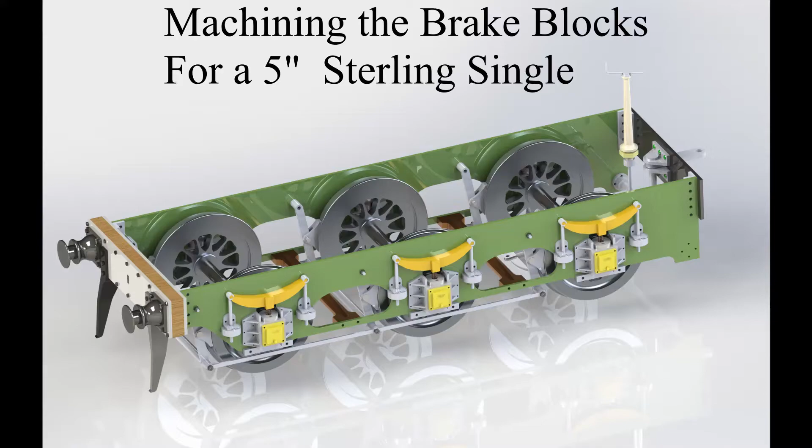Hi, well, it's Graham here, and I'm going to describe making the brake blocks for a Stirling single tender. There are a number of ways of making the brake blocks, and quite a few of the model locomotives that are available have castings for the brake blocks, but for the Stirling single there aren't any. So I'm machining them out of a solid.

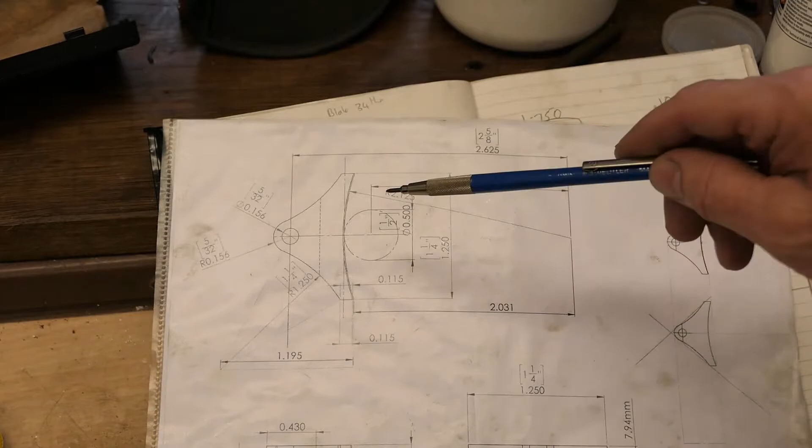There are a number of ways of doing this, and there's a number of videos on YouTube. One in particular shows the use of a boring head, and the brake block is held in a milling machine with a boring head, and this radius is cut. I'm going to do it slightly differently, and I'm going to use the rotary table.

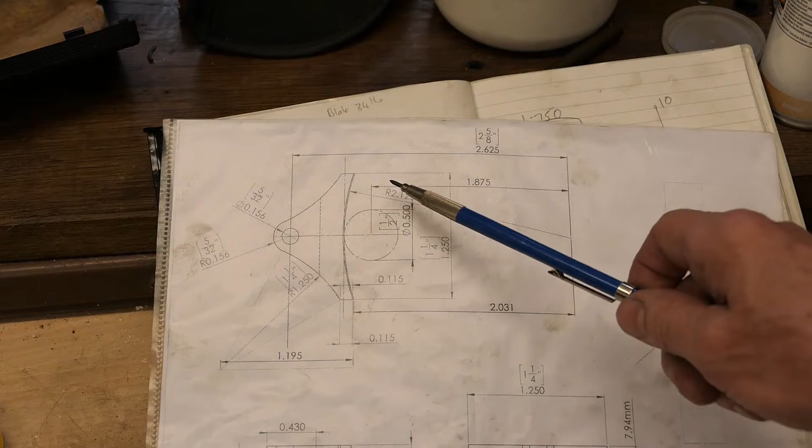I've drawn this out on a CAD package, and the radius that we want to put in is 2.125, 2 and an eighth. The circle here simply represents the cutter. So the idea is we cut it with a slight angle, because the wheels are not parallel. There's a 1.9 degree angle on the face of the wheel.

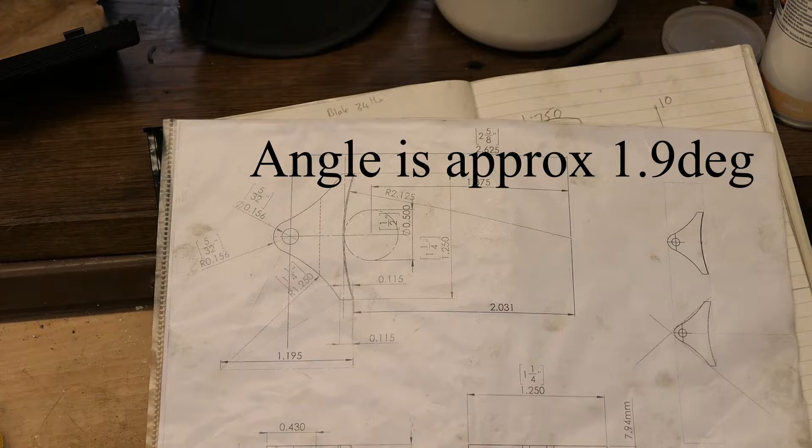So what I'm going to do is to tilt over the Bridgeport head. I'm fortunate I've got a Bridgeport, so I'm going to tilt over the Bridgeport head by 1.9 degrees and then cut this. Now the question is, how do you get this all set up so that you get an accurate radius? And of course it wants to be reasonably accurate.

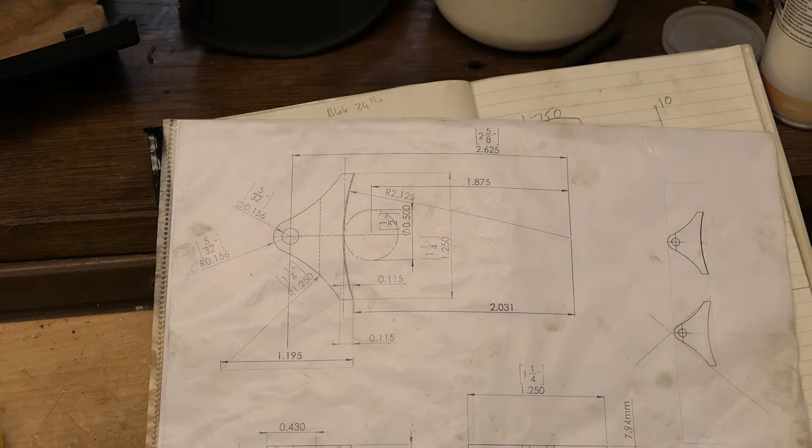Well, the way I've done it anyway is I've had some aluminium. I've had it for ages, some scrap aluminium basically. And what I've done is drilled a hole here for a peg which mounts on that, and then here at the root of the radius I put in a 1/2 inch hole.

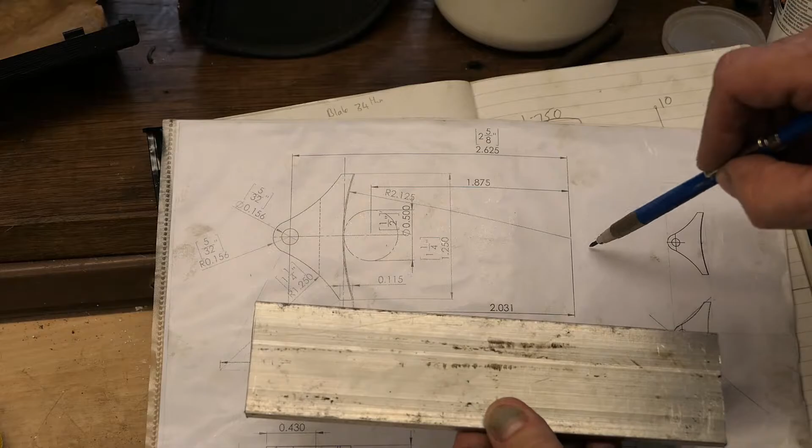Now that I've got a clean memory card, I can carry on with the video.

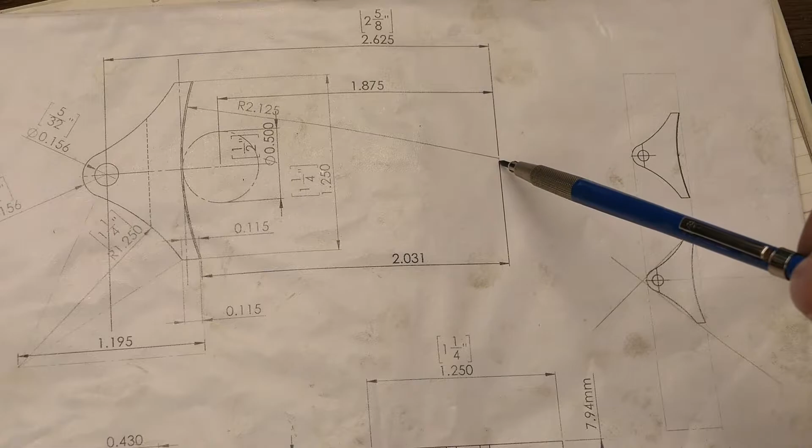Right, where was I? Okay, so I think I'd said that this circle here represents the cutter. I'm going to angle the Bridgeport mill head over to 1.9 degrees or thereabouts. I've put this on a jig, so I have a hole in the centre of my fixture which has a spigot, if you like, that goes into the centre of the rotary table, and I'll show you that in a second. I have a pin here which is exactly 2.625, 2 5/8 from the hole, so that I know that the relationship between that and the centre is correct.

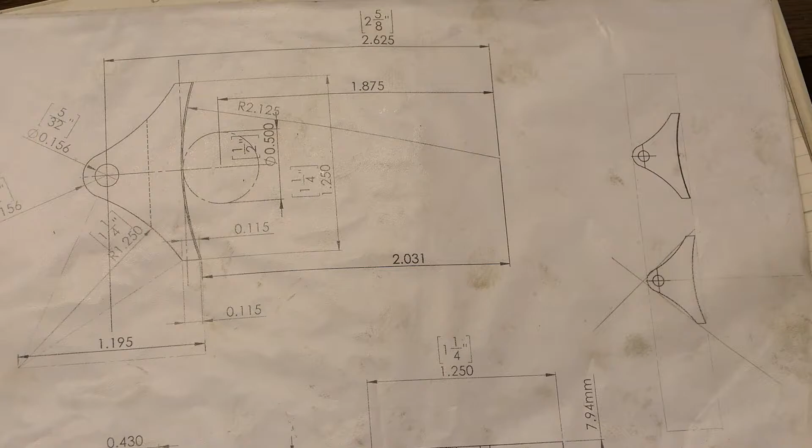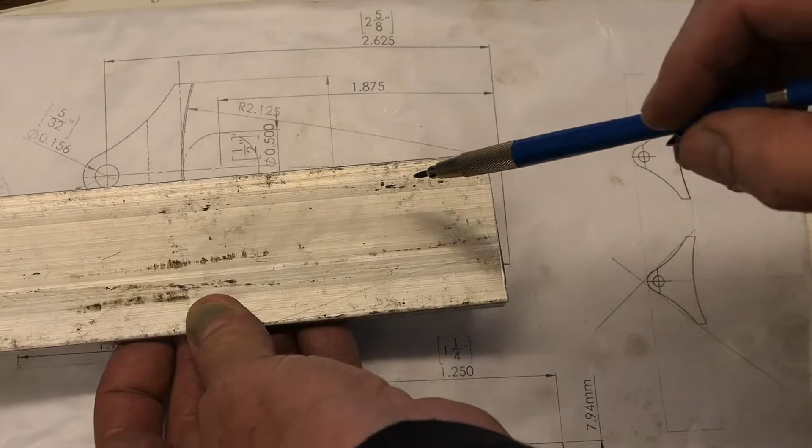The only other thing you've got to do is make sure that this is tangential with this. So how do you go about doing that? Well, that's fairly easy. Just put a square across the fixture. So this was my piece of aluminium. Going to have a hole here which plugs into the rotary table, another hole here somewhere for a peg that fits in, and I shall show you.

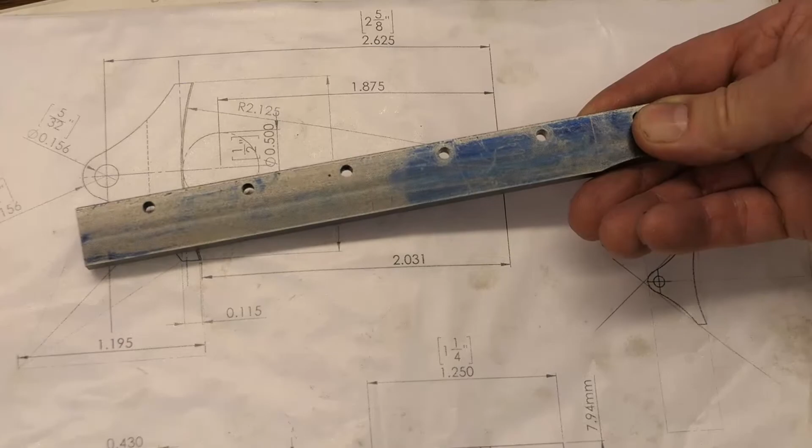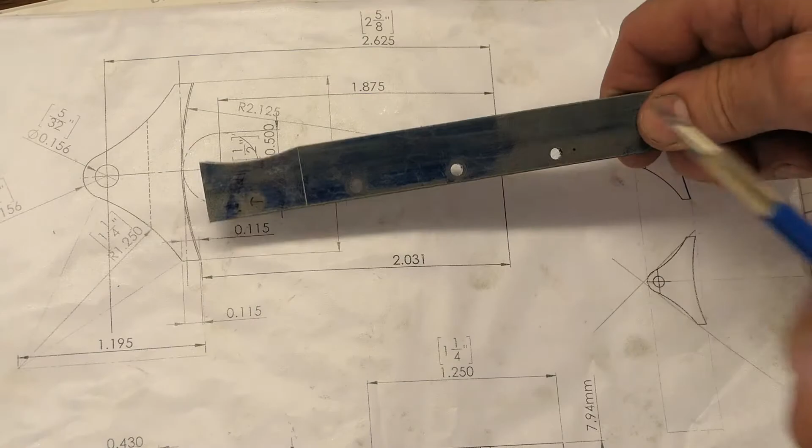So the first thing I've done is, here's my bar from which I'm going to make the brake shoes. I've drilled the holes at the relevant spacing, and I've allowed the thickness of a small bandsaw, so that when I cut these out it will take into account that thickness. I've actually machined the first one, whether you can see that. So I've got a radius there. Oh, I should have said the scale of this is 2:1, hence it's a bit big. Right, let's go over to the milling machine and see how this is set up.

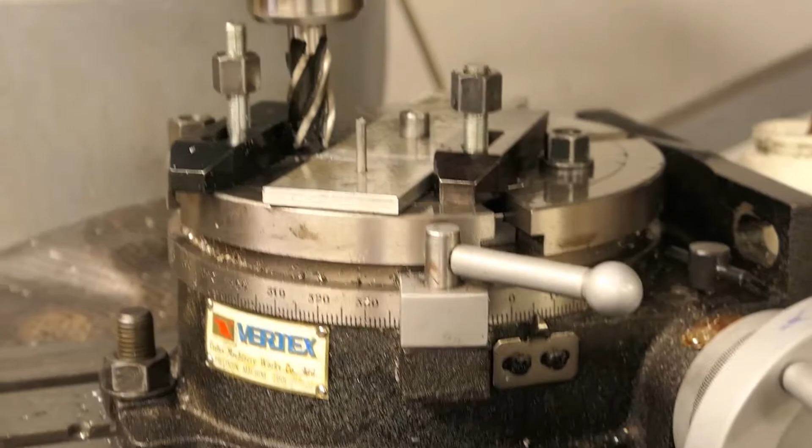There's the rotary table, and in the centre there's a Morse taper. I've put in there one of these Morse tapers you can buy online, which are fairly cheap, with a soft centre, and fitted a 1/2 inch piece of stainless steel into the centre of the hole, so that's bang on in the centre. I've aligned the Bridgeport head with the centre here, and I've got a digital readout, so I know exactly where it is in relationship to the centre.

This is the peg where I fit the bar material for cutting the radius. So let's go about it then. So the first thing I shall do is mount my stock on this pin and get everything tightened up. So I'll just stop the video there and we'll come back to it in a second.

I mentioned previously about setting this up so that we're tangential to the axis. So all I've done with that, I've got a small square, just set it up, align it with the square, and now just tighten up one of the nuts, which is good. That's probably enough actually, given the forces. I'm not taking off a huge cut.

The total cut at the centre of the radius is 94 thou, so it's not a huge amount, but nevertheless if I can get another fixing on I will do so. And I'll just get that other clamp set on there and then we'll be ready to start machining. Right, we're all set up, clamps are on.

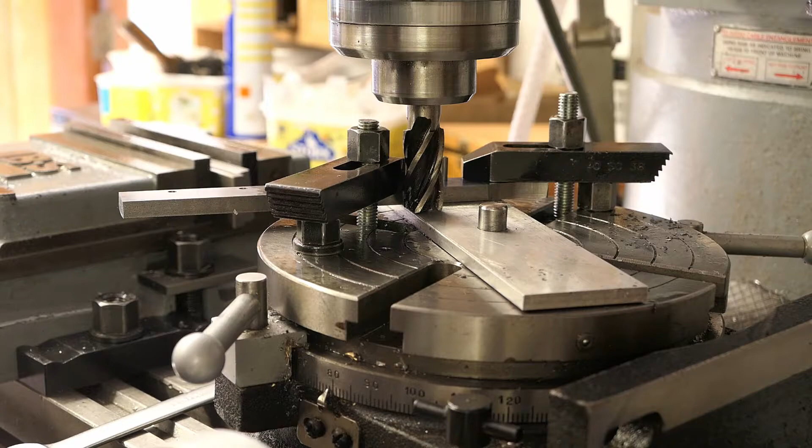Milling machine is set for 500 RPM, and I've got a 3/4 inch cutter in there. And what I'm going to do is first of all just touch on the bottom, and I just want to take a couple of thou skim off the aluminium to make sure that I'm all the way down. Anyway, we're ready to go, so let's try it and see what happens.

So it's just touching the aluminium now. The cutter's set up to give me the correct radius, so the milling machine is just starting to cut now.

This would be better, I guess, with a proper full coolant system, but I haven't got that on the mill, so I'm just using some neat cutting oil, and with a sharp cutter it seems to be going pretty well. I've got compressed air, I'll just flush some of this out of the way. And there we have it.

Okay, so I've cut all 6 on the bandsaw. Not quite true, the very last one I had to cut by hand because I couldn't grip it. Anyway, so there are the 6. Now the next challenge is, what we've got is a radius on this back end. So how do we cut that? And it isn't too difficult actually. Again, you just need a little jig.

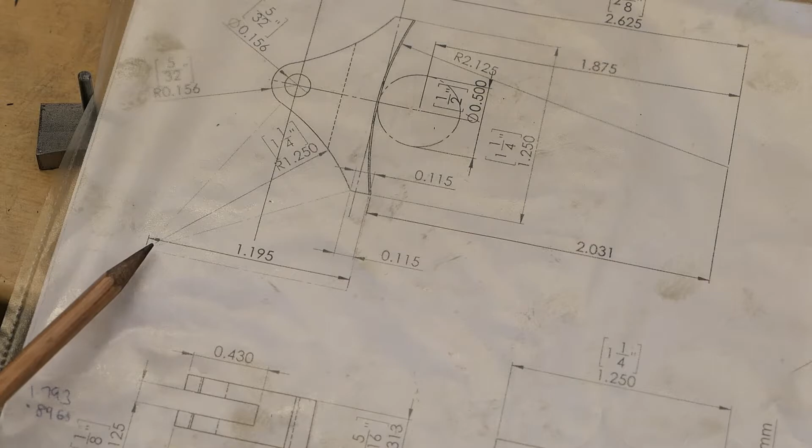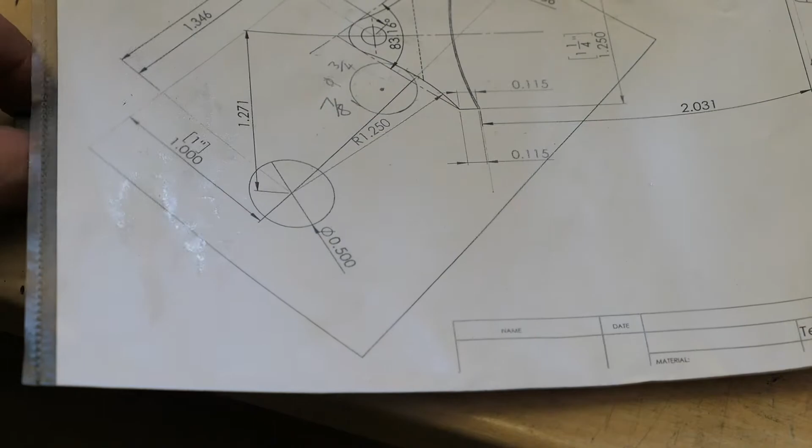So we know that the radius is 1 1/4. Now if we were to mount this again in the right position relative to this, we can cut it in the same way. The tricky bit is how do you get it in the right position. Well, a cunning plan here. So look if we can see that. I think just about. So imagine a piece of material that we can clamp this to.

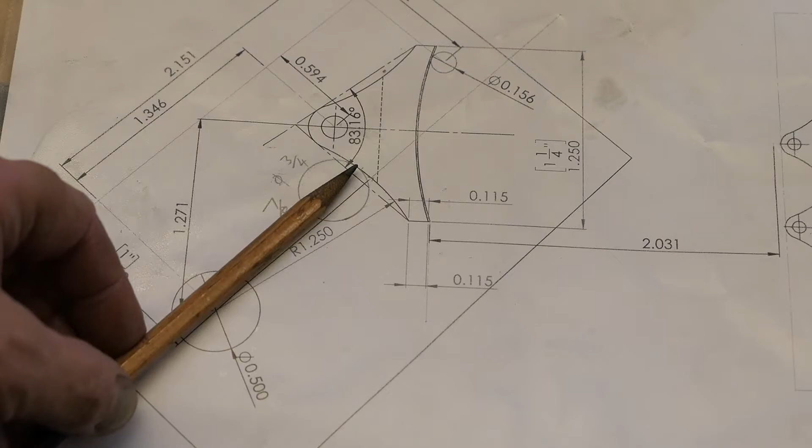Here's my circle. From here to the centre of this radius could be in line. So the only other thing you've got to do is decide how on earth do you get this in the right plane. Well, put a peg here, and we've just machined this face, so we know the distance from here to here. Peg in there, and that will orientate the material in the correct position.

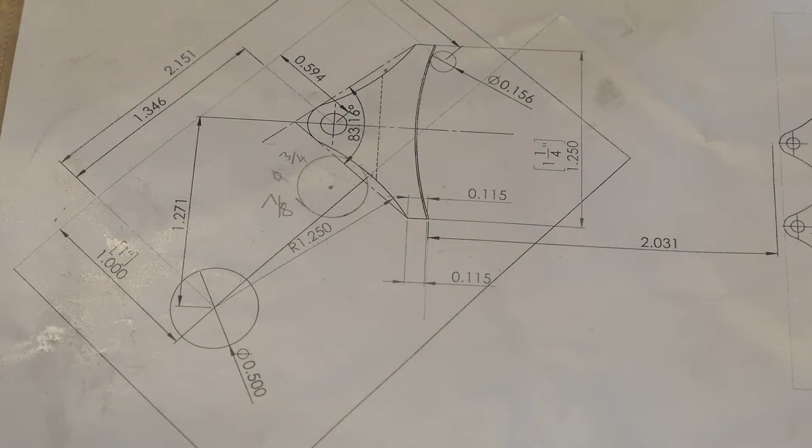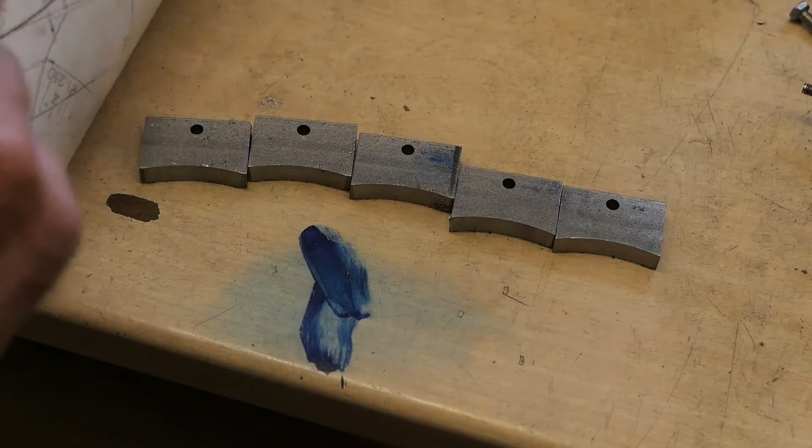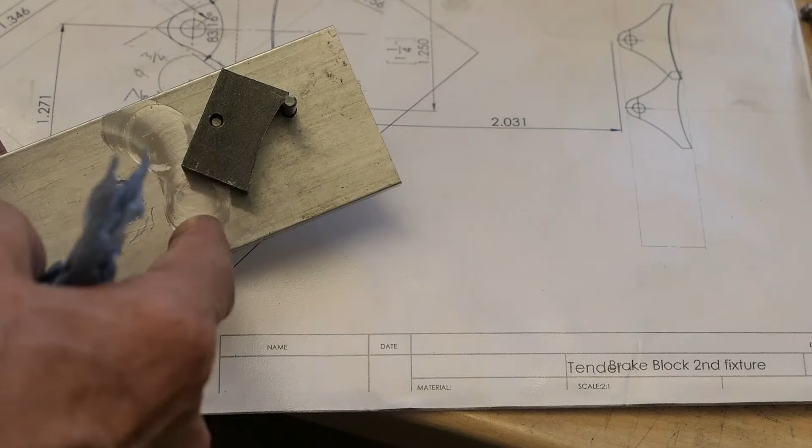So there is the bar. This is my mount for the mounting hole. And somewhere I've got another peg. So let's just see this. So put the peg in there. Hold that against there. If you can see that. And now if I cut from here with practically any cutter, I can get the correct radius, and that will be in the correct position because that there is tangential to the curve. That's what I intend to do.

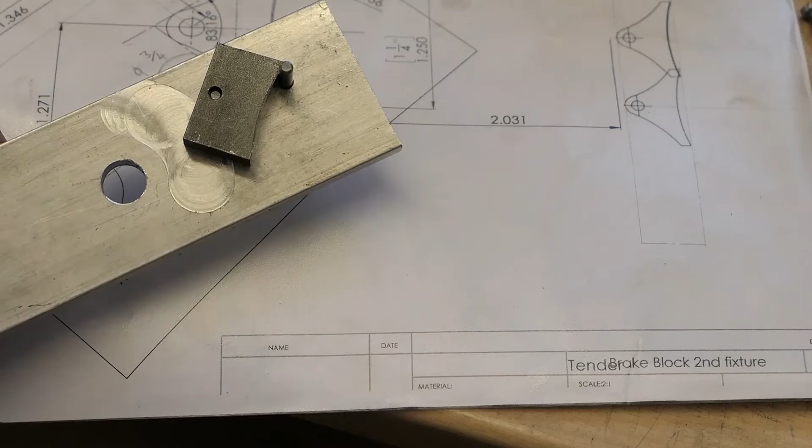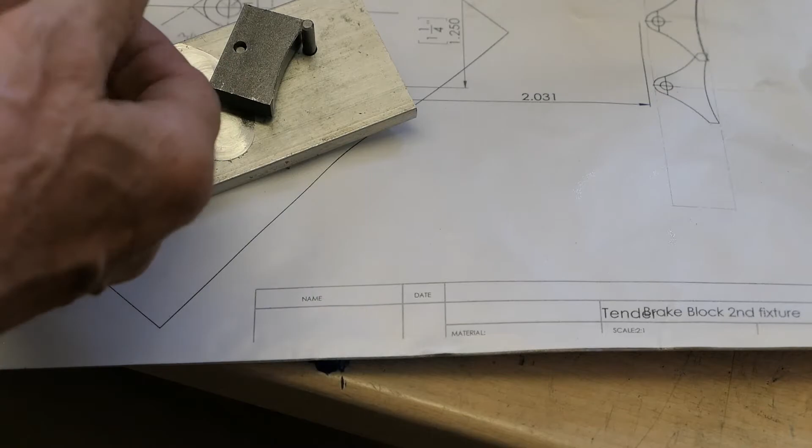So rather than cut all of the material away on the milling machine, I think a better approach is to hacksaw some of it off and then use the milling machine for the final piece. And in order to do that, I've made a couple of buttons out of silver steel. This was one. This was a test piece I did earlier just to try things out. But what I can do with the buttons,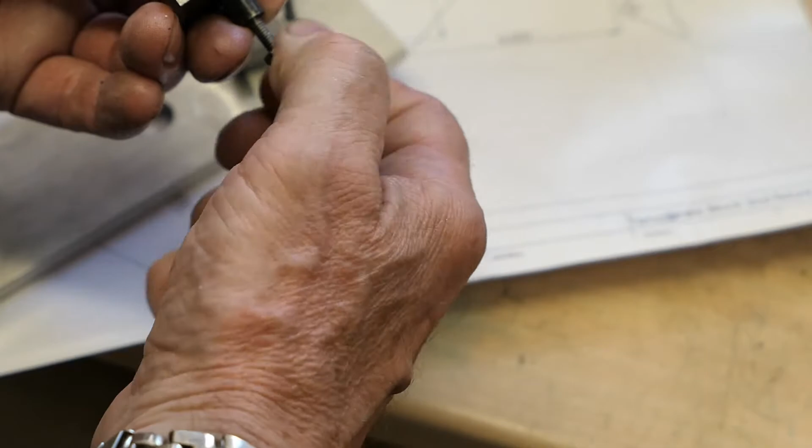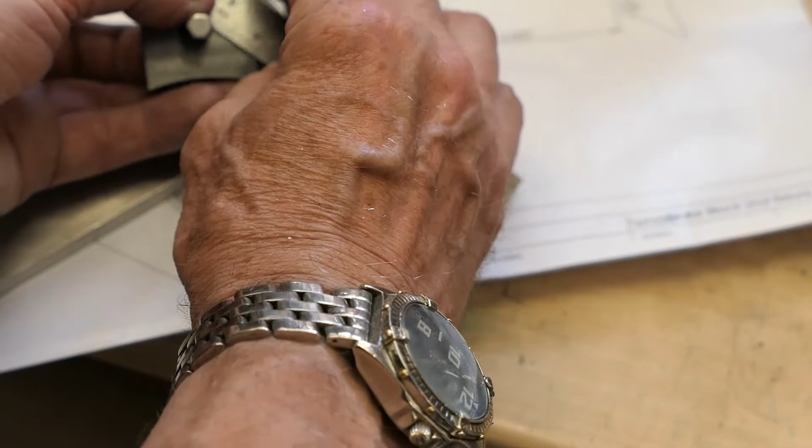so buttons on there. So look, can you see that? Yeah, buttons on there. And then draw a line from the button, because it's got to be tangential to the button, to the edge of the material, and just hacksaw that bit off, and then I'll put it on the milling machine. So now to do some hacksawing.

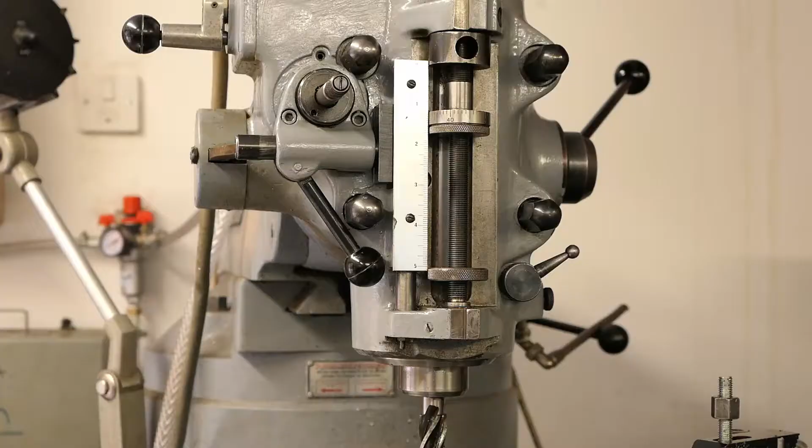So I've just roughed these out now with a hacksaw, ready for the next stage of machining on the milling machine. I just need to pop the milling machine back up to vertical before I do that, and then we're good to go. So actually, just before we start machining, I thought I would show how on the Bridgeport you can re-set up the head to be vertical fairly quickly. This is probably not super accurate, but it's not bad at all.

And the method by which you do it is to use the reference faces which are machined into the Bridgeport here and here. So if you've got an accurate square, which I think if you can see that, this one is pretty good. I've measured it as best as I can, and as far as I can tell this is accurate. So how do you go about doing it? Well, it's simple. Just put it onto a flat surface, something that you know is parallel to the vise.

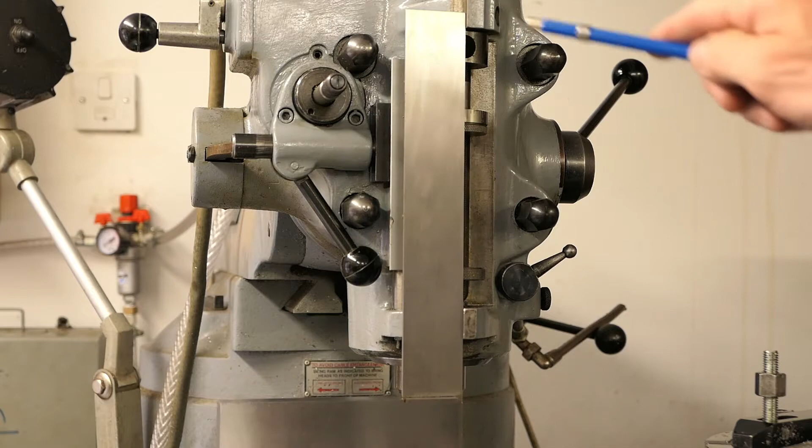Is it super accurate? Well, I reckon it's within 2 or 3 thou over that sort of distance, which for the purposes of most of the stuff I'm doing is adequate. Anyway, back to the machining. Right, we're set up on the rotary table. I can just move around slightly.

You'll see that the brake block here is tangential to this peg, so the curved face is over here. Then if I just come around, you can see how I've got that clamped up, and we're ready to take the first cut. What I shall do is make sure I'm clear of the piece before we start machining, and then start machining. So let's have a look if we can do that.

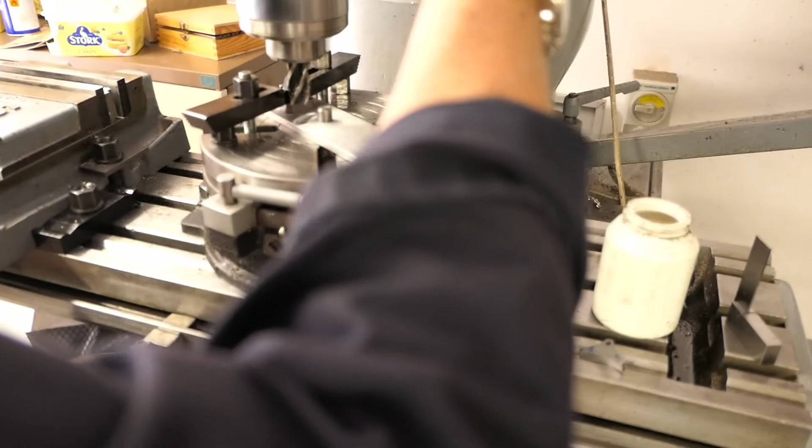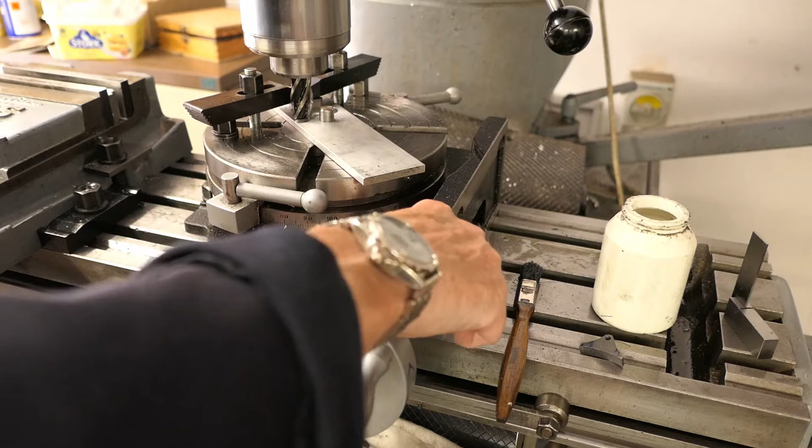I've lightly touched the aluminium. I'm going to back it off a couple of thou or 5 thou, so I'm clear of the aluminium now when I start the mill. I shall start it now and then put back 5 thou, 6 thou, so I'm just touching the aluminium, and we'll do the cut. And I'm just going to make sure that the backlash is removed from the rotary table. That's the way.

Right, start there. Just touching the aluminium, and now starting the cut there. And there we are, that's it. So the cut takes 30 seconds or so. The setup takes a little bit longer. Right, now the thing is, because this is symmetrical, I can simply...

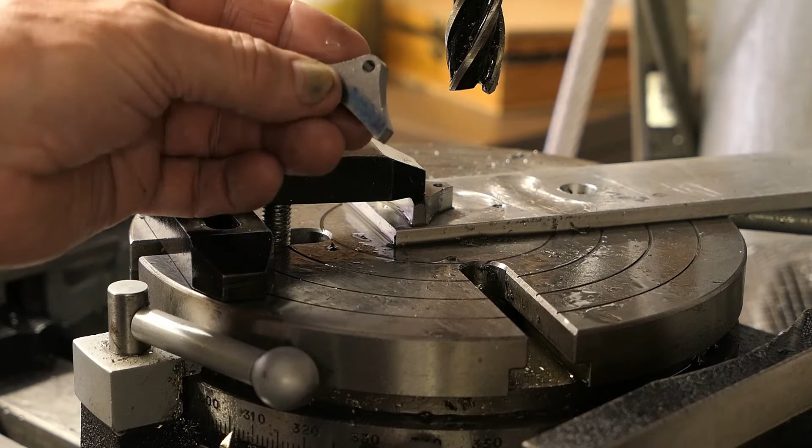Right, the final piece on the machining on the rotary table for the brake block is to radius the end here. And I actually made a couple of filing buttons to do it by hand, but then I thought, well, I've got it on the rotary table anyway, why don't I just do it on the rotary table? And that seems to be quite a quick way of doing it. So here we go, and I'm just going to do it now. Bring that down.

Cutter is still running the same 500 RPM, 3/4 inch cutter, high speed steel, and this is not having to take very much off, so the size of the chips are very, very small. And I'm only doing this by, if you like, eye and feel, so that once I get round to the other side, I'm just trying to get it to the point where it starts to blend with the other radius, which is just about there. And that's it. So it only takes a couple of seconds to do that.

And that's the finished radius. And the only other thing I've got to do is cut a slot now in the tops of all of these. I think it's 1/8 of an inch, and I'll have to use an end mill for that, which is a bit unfortunate really. I'd much rather use a slitting saw, but at the moment I can't think of a way of holding that so that I can get a slitting saw in position to do it. Anyway, I'll have a look at it and we'll see where we go.

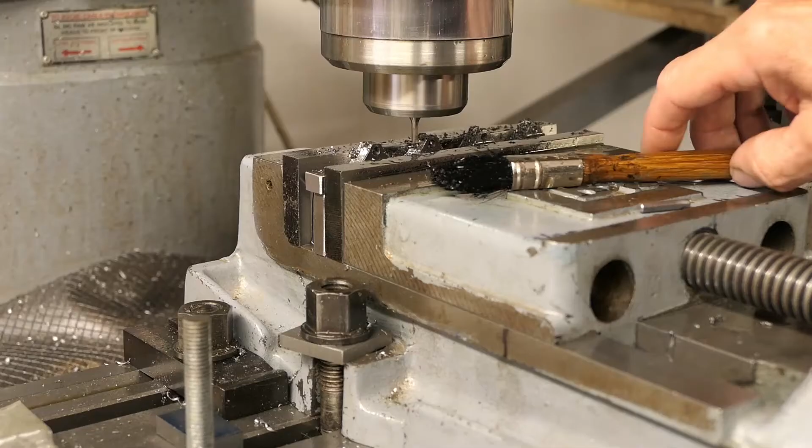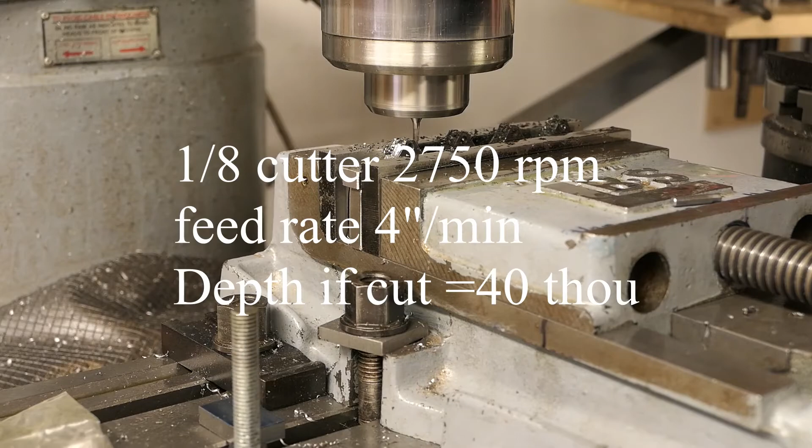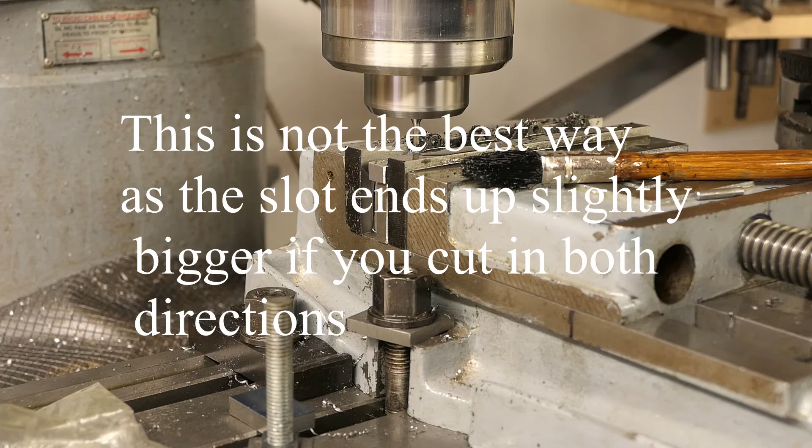It's a 2-flute slot mill, and because of that I can cut really in either direction. So I'm now coming back. I'm just using some neat cutting oil.

Because of the small diameter, I'm only taking, as I say, 40 thou cuts off each time, which means we need quite a few passes.

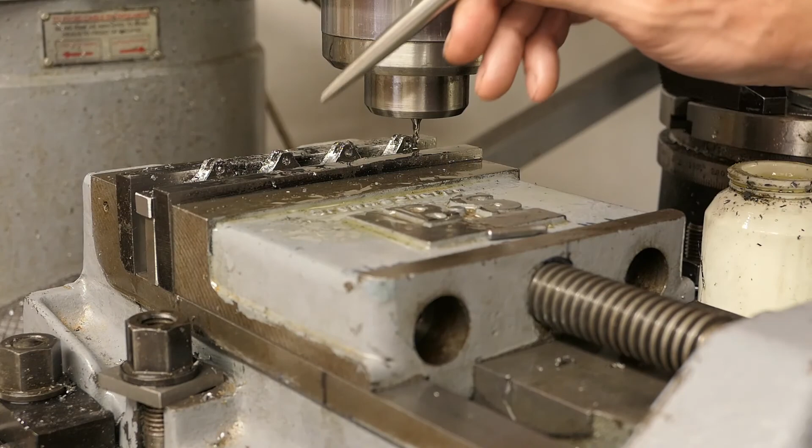Just turn it off for a second. Not sure whether you can see the setup here, but what I've got is a parallel, which these are sitting on, and then there's another parallel here which is used to grip this face. Unfortunately the parallels were very fractionally bigger than the size of the brakes. So in order to grip them safely, I've used another parallel there, and it's holding it roughly in the middle. So that seems to be a very secure setup. Right, let's carry on.